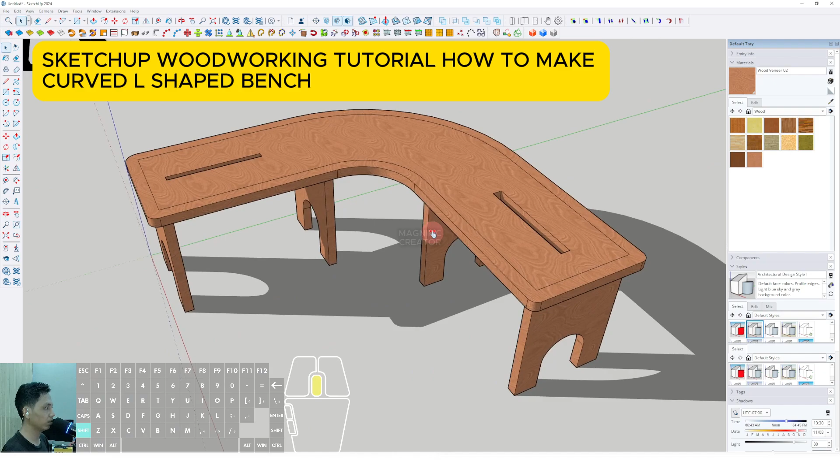Let's begin the tutorial. First, we have to make the side, creating the basic shape using the line tool. We click from the endpoint and type the length of the bench, around 1.5 meters, then set the length for the other wing around 1.5 meters also, and enter.

Then we select all of this line, select offset, click this edge, and offset it inside around 500 millimeters.

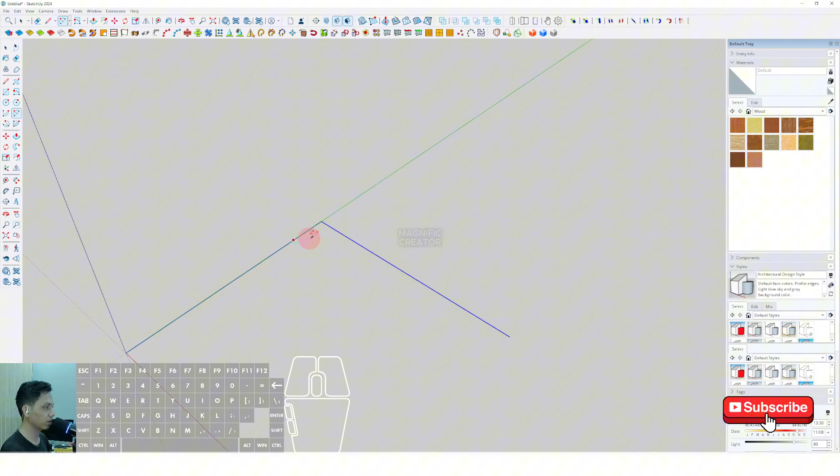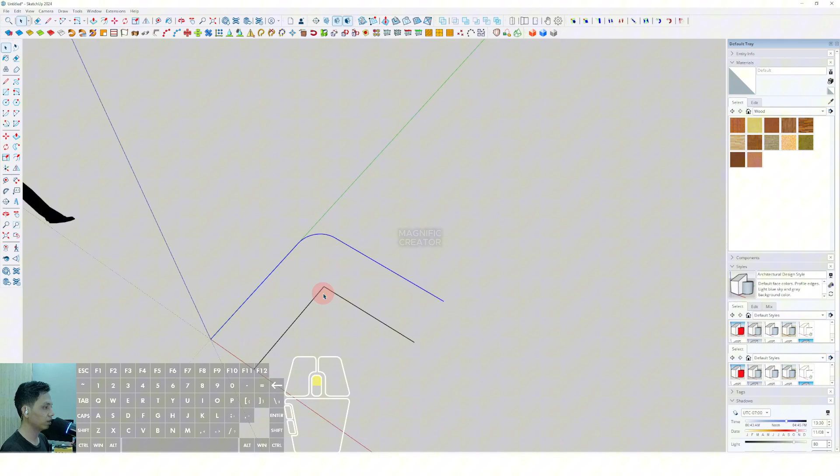We have to make the curve first using the 2-point arc. We click from this edge and click on the edge. Then we select this one, select all of this line, and offset it inside. Click this edge and offset it inside around 500 millimeters. We see that this is not good, so we have to make it a different way.

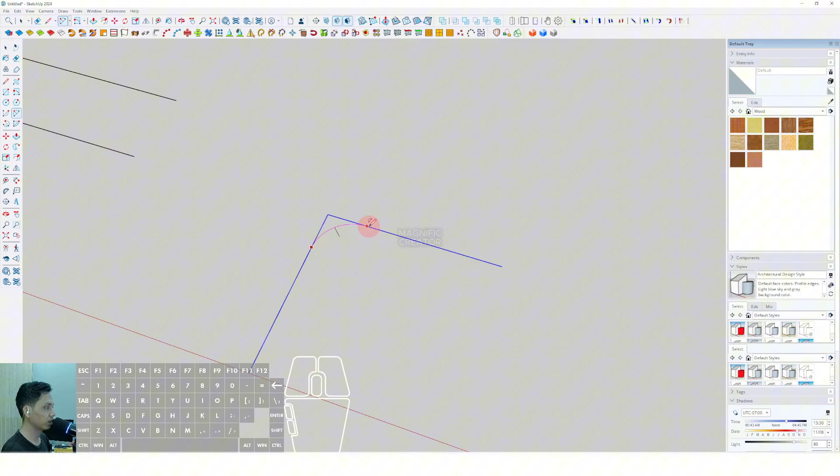We select this inner L shape only, select move, tap control, and place it at this position. Now we make the curve first. We select the 2-point arc, click in this position, double click. Then we select all and offset it outside around 500 millimeters.

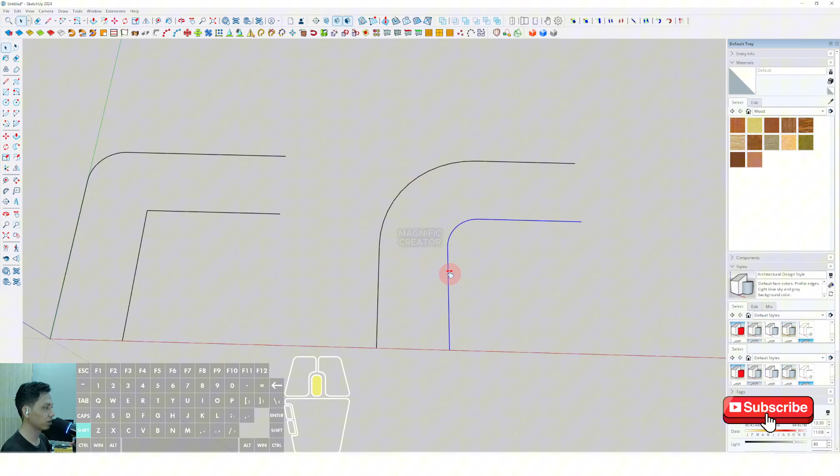You can see the difference between the left side and the right side. The left side is not proper, but the right side is the beautiful one. Then we delete some unnecessary lines over there, and move to this position.

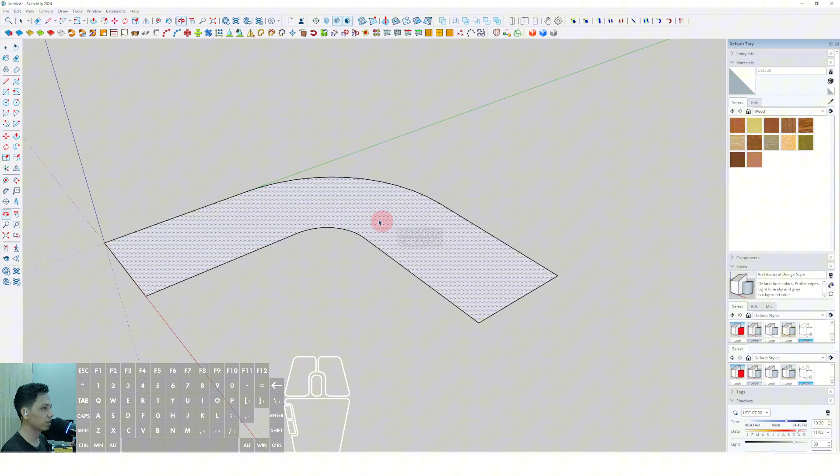We close every single line over there using the line tool, clicking from this endpoint to that endpoint to close it. Then we click this surface and push it up around 40 millimeters.

Enter, then triple click, right click, and make group. We can also check on the right side the default tray option.

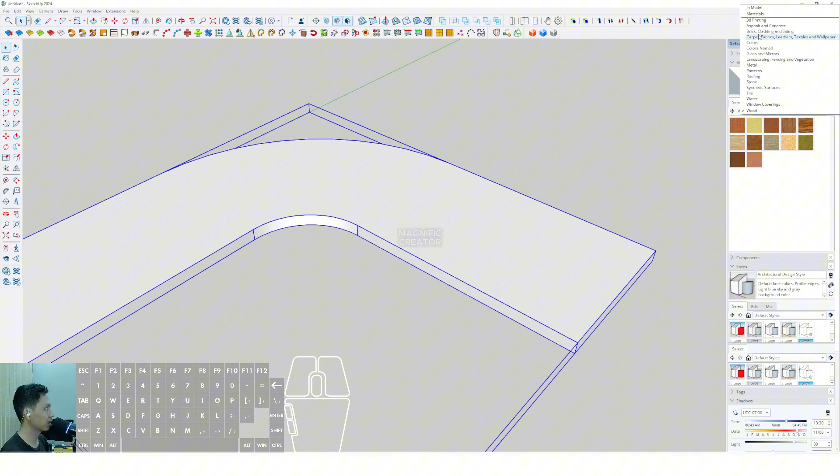We click the materials, click select here, then select wood, and now we select the kind of wood like this and click on this board.

Now we click this object, select move, and move it up around 500 millimeters. Enter.

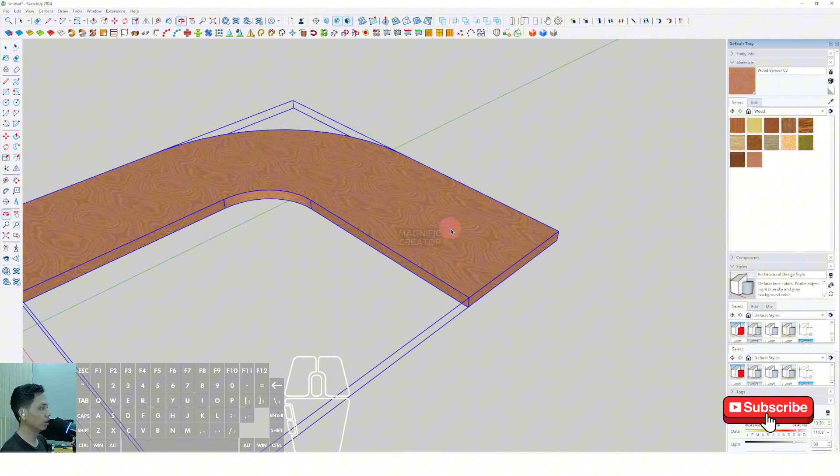Now we make the support of this bench using the rectangle or rotate rectangle tool, or maybe we make the offset inside first. We click this one, click the surface, and offset inside around 50 millimeters. Enter, and exit from the group.

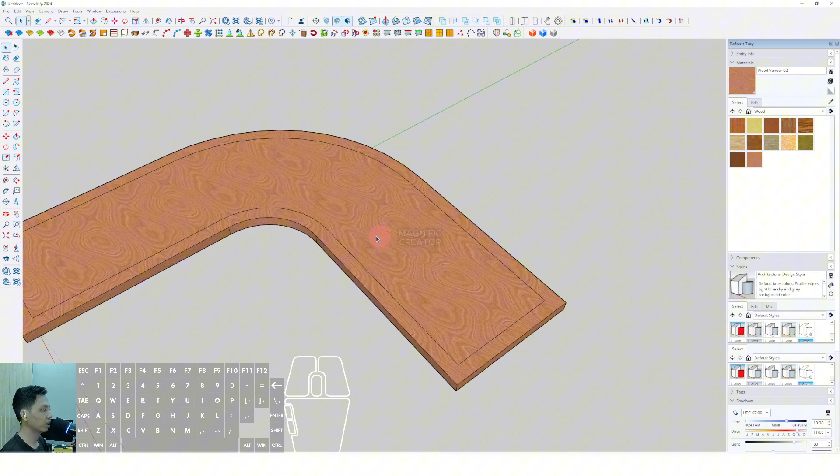Now we draw the support using the rotate rectangle. Click this point until this point, then set the depth of the support frame around 40 millimeters.

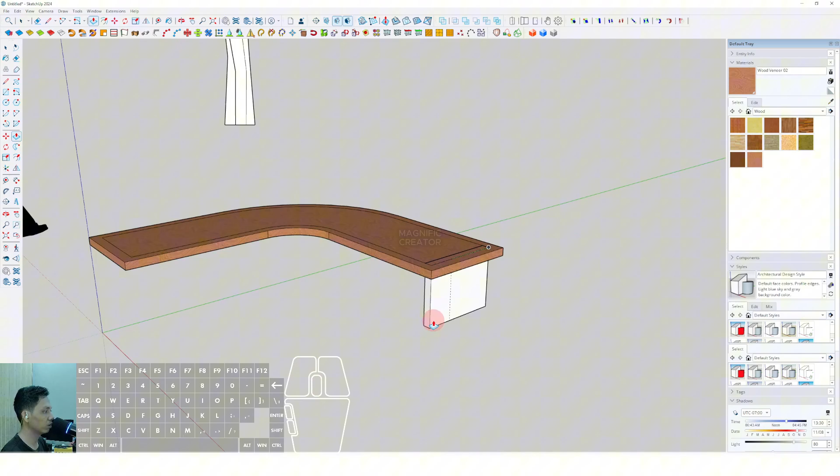Enter. Now we click this surface, select push pull, and click this surface down to the bottom until this origin. Then click the surface, select push pull, click the surface, and click this endpoint.

Now we triple click, right click, and make component, then create. Then we make the variation of the support.

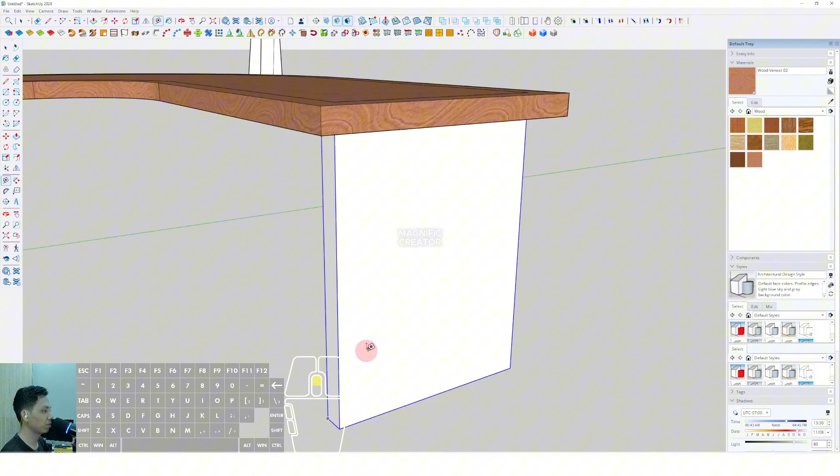For example, we use the tape measure tool, click from this edge until this midpoint, and click from this midpoint to the left side and the right side, around 100 millimeters. Enter. On the left side around 100 millimeters, and enter.

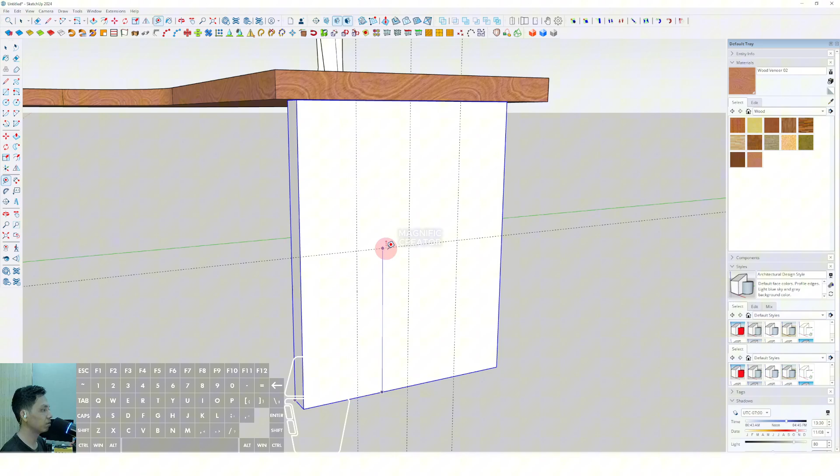Then we click from this edge to above around maybe 200 millimeters. Then we triple click.

We select 2-point arc, click from this position until this position, then type 64S to make it smoother. Then we click to this position.

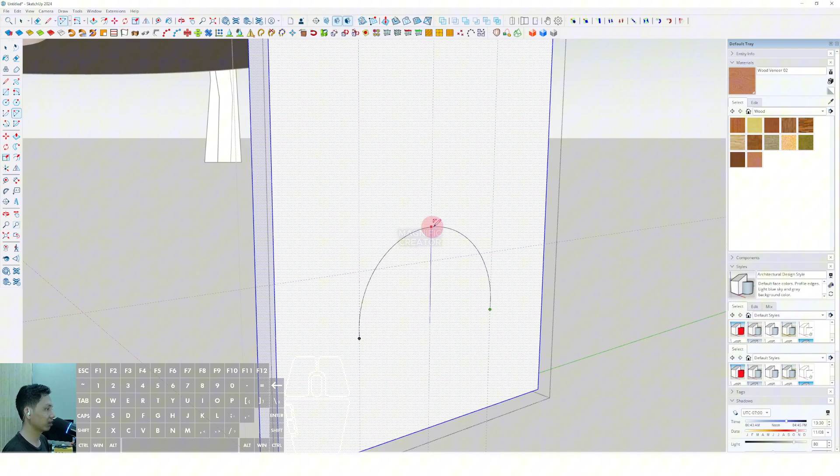We click to this position, then click this line until this position, then click this endpoint until this position.

Now we click this surface, select push pull, click this surface until the limit and click, and it will automatically form like this. Then we erase some unnecessary guidelines over there.

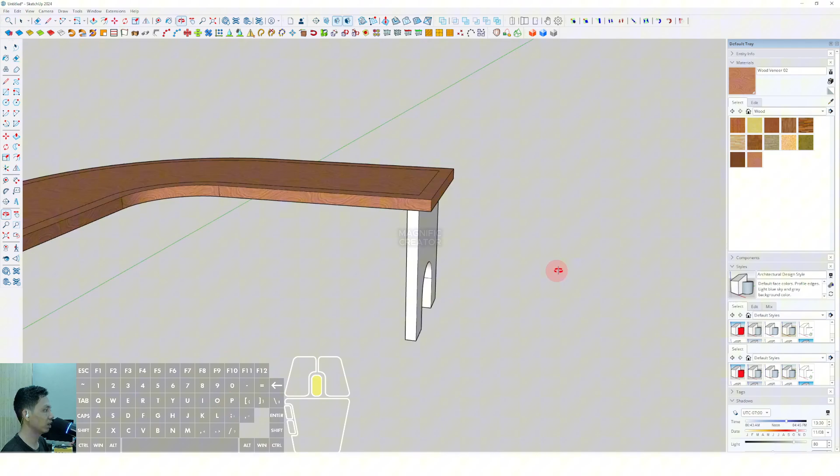Now we assign the materials also here. Then we move this one to this position to make sure the position is on the correct place on this inner offset like this, and select move.

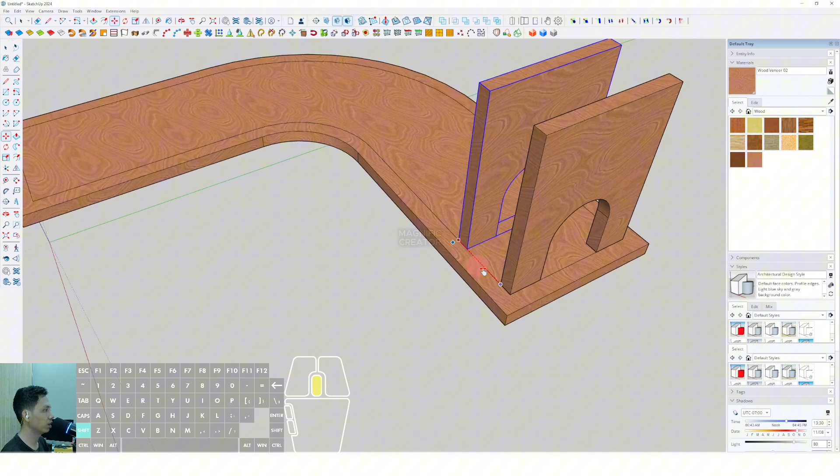Select move, type control, click this endpoint until this endpoint. Then click both of this object of this support. Then select rotate.

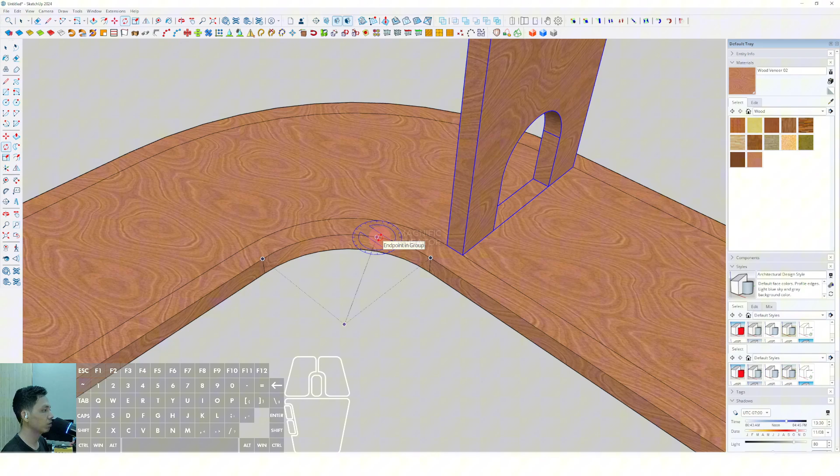We position the cursor on the edge of this curve, and quickly move the cursor until this midpoint. Then click this axis and tap control, type 90, and enter. Then select move, click this endpoint until this endpoint.

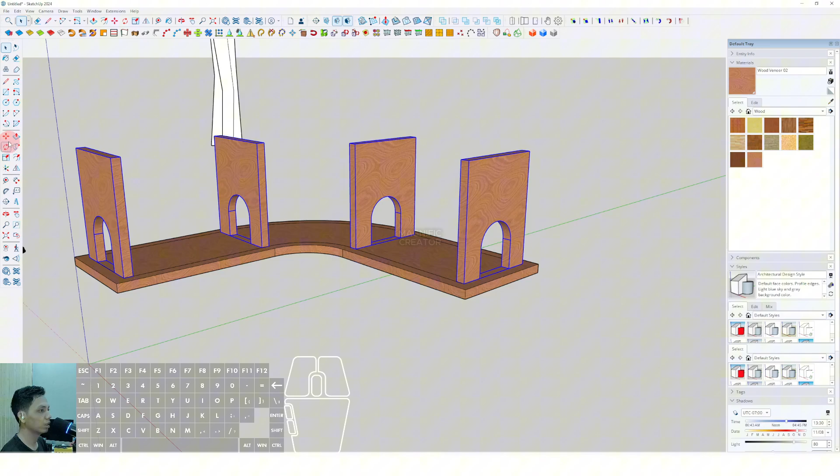Now we select all this support and select move, click on the corner, and place it at this position. And it's done.

So you can make another variation. You can make a little curvy shape on every single corner over there. Like this, and also this one.

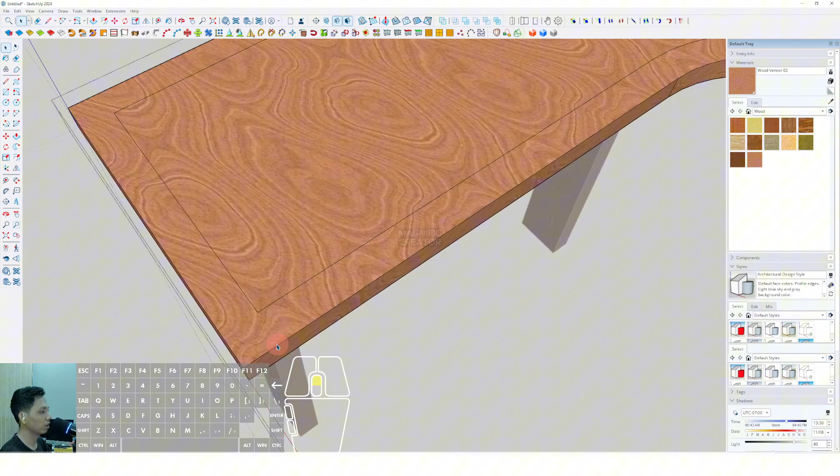We can push it down. Okay, you can push it down.

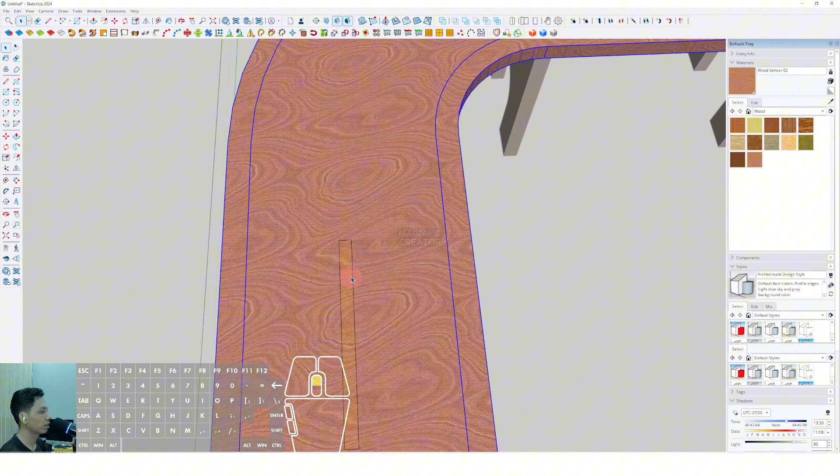Or maybe you can make another simple hole in here. Then we push it down till this position, and we push it down until this position.

Then we can now activate the shadow, and activate the white, or maybe we can leave this one.